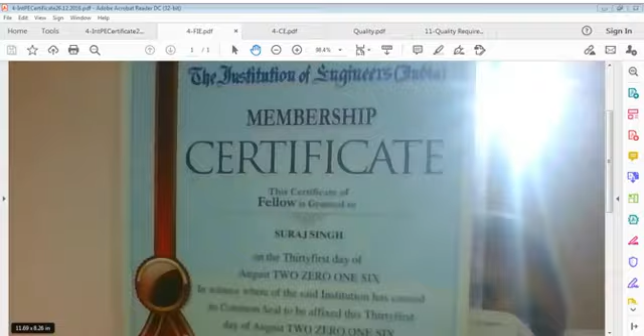my will, my concentration, my dedication towards quality is very important because these certificates, like professional engineer certificate, international engineer certificate, and this fellow membership certificate which is called chartered engineer, have no value if we can't give quality. Quality is very important. Quality requirements are very important. Well, quality is everybody's headache, to be very frank. Particularly engineers all over the world are responsible for quality. They must be, and they should be.

Our engineers in this country, I cannot blame everybody, but in general, quality is overlooked. It's condoned because target is not quality, target is project, target is milestone, target is only quantity. In many cases, there may be certain people who are good in quality because they have worked overseas also. They understand meaning of quality, and everybody understands actually. But the system is like that. People are fed up with that system, but it is very difficult to achieve quality in our system, in our country.

And it's not only in construction, it's in every other field. You buy whatever product from market, you will not get quality. Whatever quality you expect when buying something, you won't find that quality in reality, in performance. This is a very small slip I am showing to you, just 7 papers, and also in different fonts. It states something about quality and approach, and I changed it many times, on the 15th, then 21st, and then on 23rd May.

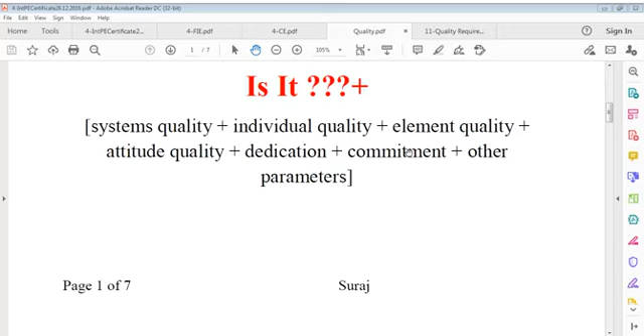So it is each person's responsibility, including top. You cannot say only the quality person is responsible if quality has gone out of control. That can't be said because it's a question of system. If the system is involved, quality control is also involved. Even one wheel cannot be out. If in a train one wheel is out, two wheels are out, how can you expect the train to move? If you take out one wheel of a car, you think you can drive the car that way? You can't, except in some cases very slow. Everybody in an organization should be considered a fit person, and that's a very important point.

A little further, again I say designs of structures and others must be qualitative and reliable. There are so many issues which have to be considered in the designs. We have to consider every common design first. Forget structures currently. Designs of every activity, designs of even the very smallest work. Something you want to talk about, you have to think before. Just like we form an agenda, that's also a part of the design of a meeting. We section this meeting in such a way. That's also a kind of temporary design, but we do that.

It applies everywhere. Just like we design our timings, though we call it time management or tabulation of time, it's a kind of design. It should be justifiable. No time should go to waste. There should be quality for everything. Time is not in your control. Time is passing. We say, rise, the day is passing. Get up. Day is going. Catch it. Hold it. It goes out of control. You can't do anything. And that's the control of quality.

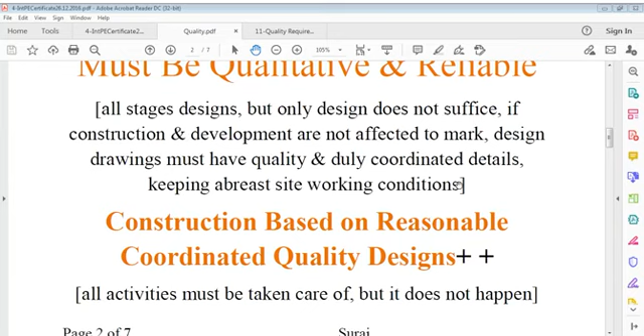Construction based on reasonable, coordinated quality designs—that's what I say. Construction based on reasonable, coordinated quality designs.

If our designs are quality, detailing is quality, and nowadays computers are available, coordination may not be a big problem—because that coordination is not only structural or structural-architectural coordination, but also related to remote works like services, which are very important. There are many types of services these days to support a building: electrical, mechanical, HVAC, lift, security, or many more electronic services like CCTV, gas services. You may define what more—there is no limit, depending on the type of building or structure it is.

So again, construction based on reasonable, coordinated quality designs—all activities must be taken care of. But it doesn't happen. That's the point here—it doesn't happen. Why doesn't it happen? All activities must be taken care of, but it doesn't happen. That's the problem.

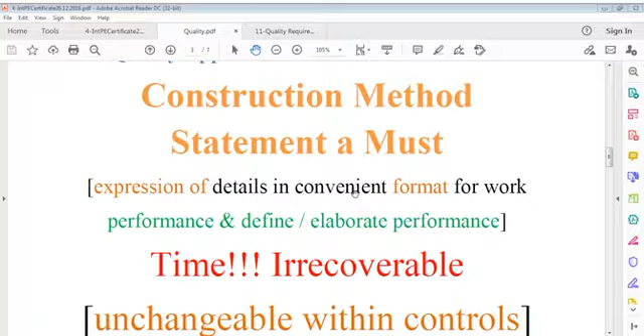That's what is important. So we have to be considerate about time, which cannot come back, which is irrecoverable. Time, if you lose it, you can't recover it. Time, if you gain it, you get the benefit of progress. You can move further. So you can say time is a very important factor, and it is unchangeable.

You can't change the contract duration. You may reduce it through your efficiency, but you can't enlarge it. You can't extend it yourself, because it's a question of cost for someone. So time is to be considered that way. Whatever is the project time, you have to use that time properly.

It should be established practice to understand time, to use time, and to finish milestones according to that time. That is defined by planners, by planning management, by a planning organization, or if you do it yourself, you can do it yourself, there's no bar. You can be the planning engineer of your job, or hire some good friend as planning engineer who looks into the matter successfully and seriously. And then time relates to cost.

If you do the work in the defined time, of course you stay within budget. And if you exceed time somewhere, this means cost is exceeded. And if you reduce time on the overall project, certainly cost is reduced to some extent. There could be any reason for that. So the time factor is very, very important.

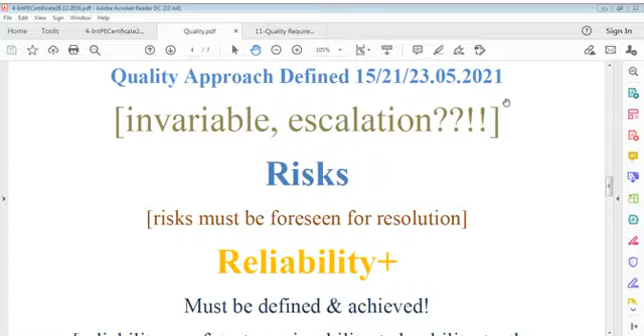If you are able to, because of your experience, foresee that risk, you can contemplate and think of resolving solutions if you know what the risk could be. That is very important. If we know the root of that risk, we can eliminate that root and put in our convenient support so that risk mitigation is done, and we can perform in a better, more efficient way. That's very important, and that's the job of every engineer.

There is no bar. If you want to refine yourself, if you want to refine your project, if you want to move your project fast, people will be happy. As far as controls are concerned: cost control, quality control, time control, research, and many more controls where everything requires control.

Reliability is a great definition, and one not so easy to achieve in normal circumstances. That reliability constitutes a very high profile, and that profile you have to establish.

Whether I am reliable or not, I cannot say, but I can understand whether I am reliable. People have different criteria to view my performance - my clients, my associates, my colleagues. They may understand my performance, but what they expect I don't understand. Either they tell me, or I judge from them, since maybe they can't speak to me openly. But if they can do that, then I have to understand it my way and grasp what they expect of me.

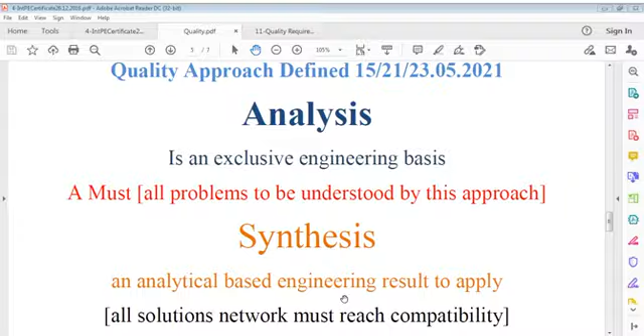Or you may say both are powerful. Analysis in one direction, synthesis in the other direction. If one is plus, one is minus, but both work together. Work is same, name is different, that's all. So synthesis, an analytical based engineering result to apply. All solutions network must reach compatibility, which is, you can say, interface it together.

Interface together with all disciplines, whatever you are going to do for that project. And that network must be compatible. Your work should be compatible. Your equipment you are providing on that project should be compatible to support electrical, electronics, some other facility. Whatever is there should be done properly in a coordinated manner.

If you are not able to do that, then you have to call that sub-discipline engineer or that discipline engineer and discuss and decide. So you have to coordinate. You have to coordinate unlimited thinking. Thinking is unlimited, it's not one thing, not two, not three. However many points come in there, you have to think about. It is an unlimited activity. That point you have to understand very well.

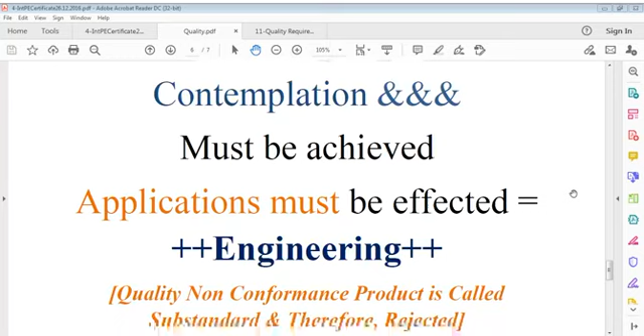Sometimes people are not able to conform to requirements for whatever reason: ignorance, incompetence, or redundant personnel on site or in designs. I don't understand why not comply with the requirements when you are getting paid. What is that? Why are you not getting it? That's the question. If it is a genuine one, there is no complaint. If you are just discussing, I am not talking of that. I am talking of free handling of material and timing.

So we can say non-conformance means the engineer is either careless or ignorant or incompetent, and therefore redundant personnel must be acted against. We must change to requirements to achieve intended quality standards for universal recognition. Quality requirement checks being a must, missing which we have to blame ourselves for quality failure.

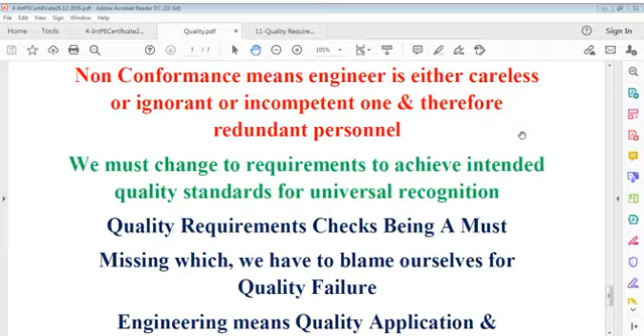Quality requirement checks being a must, missing which we have to blame ourselves for quality failure. Engineering means quality, application, and continuous improvement of quality. Quality improvement, we said, is what we say.

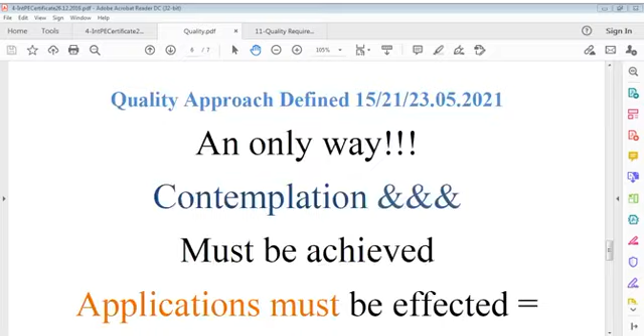Now we'll talk of quality requirement checks guides. This is the item for excavation. We have explained it already, including surveys, setting outs, all that. I can't explain every time, but you can use this page for reading if you wish. There is no problem. I have explained all these points before. There's no meaning in explaining again and again, but you can make use of this.

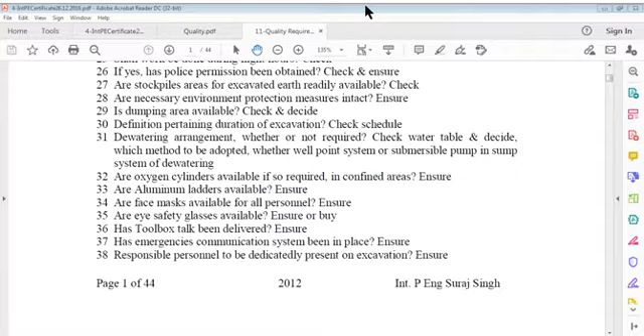Gentlemen, let's go to quality requirements now. Last time I explained to you about excavation, about setting out, which contains surveys, establishment of site points, dewatering requirements, safety issues, what to do, what not to do, hot work or cold work, PPEs, toolbox talks, etc. to be considered in that.

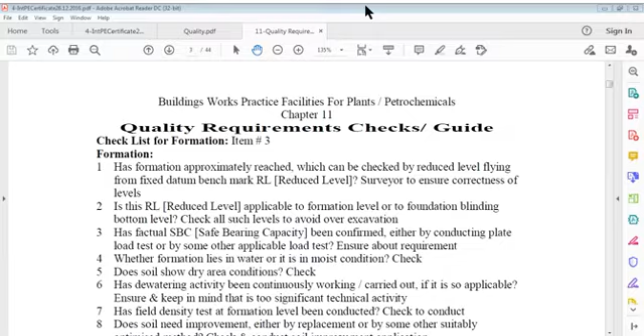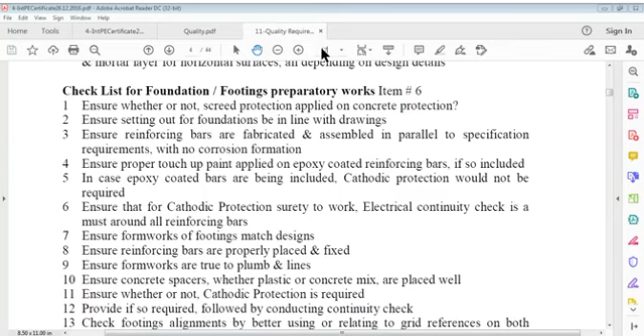Then we talked of hand excavation or manual excavation to make sure that existing live services are taken care of. This was in that item. Then we talked of formation, which is a very important point, and then blinding, and many such concerned activities like concrete protection or waterproofing, which is a very important activity. Some people call it waterproofing, but I say the concrete surface should be protected from soil.

That is very important, because if soil contains chlorides, sulfates or other chemicals which are harmful for the concrete surface in the foundation, because the surface is in contact with soil, those chemicals can penetrate into the surface of concrete and cause harm. Generally foundations are in contact with soil up to at least ground floor level.

To protect concrete surfaces from such harms, we provide this membrane, which is called a waterproofing membrane or protective membrane. Generally it is called a membrane, people call it waterproofing, but I usually call it concrete surface protection from soil. It's not so simple technically speaking. There are so many issues in that.

Well, if it is a plant area, facilities area, a big refinery, that's different, because there are no structures around. It's a new green project, and of course a sea area, but it is raised and in better control than a buildings area, residential or city area, where buildings exist already and there may be impact on the soils which found those buildings. Generally the problem lies in the strata below: sand, limestone, soft sand rock, clay or silt strata, depending on the area.

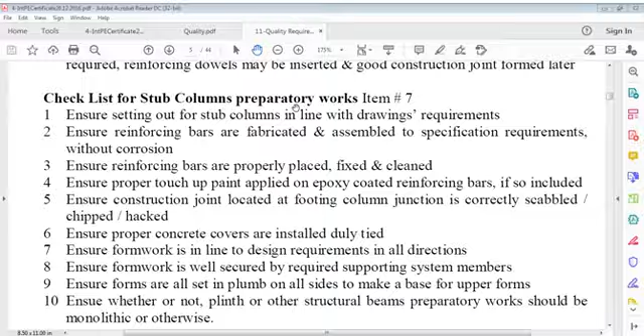Then this item of stub columns is mentioned here clearly. It's not a very long item. I have given a description of stub columns. Then backfill work. Backfill work, some people consider this important, some people don't consider this important. But for me, it's a very important item, backfill. It's very important depending on the type of project.

There are so many classifications of fill or backfill. You can say selected fill, imported fill, desert fill, granular fill, or design fill. So many types. Sand fill. This fill, some people don't take it seriously, but it must be taken very seriously, because these lead to future problems. And people don't have an idea about density of fill, or this may cause sinking in future, settlement in future.

Generally, below foundations we don't consider fills. Yes, we can consider fill when we improve soil, but that fill is different. That is not the fill I am talking about. That is soil improvement, which is well compacted, well designed, well tested. The fill I am talking about is backfill, surrounding foundations, surrounding all foundation beams or columns, and whatever space if you have done mass excavation, which is generally done in many cases to have better circulation of work and machines.

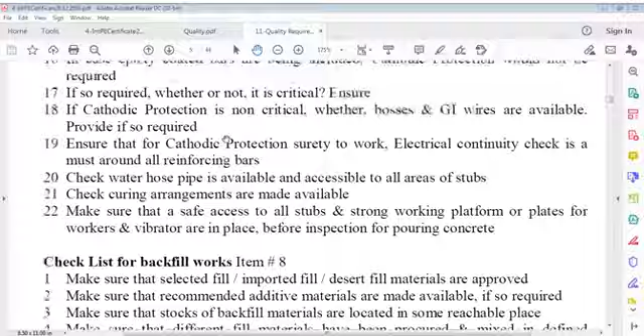Yeah, it's that. Check whether or not all substructural activities are completed, including block or brick walls. Check that all rubbish and debris are cleared from the area. Ensure concrete protection membrane is applied on all surfaces and well protected. Ensure bottom portion of shoring is removed. Ensure stages of shoring removal during backfill progression. Ensure backfill activity approvals prior to starting a backfill layer.

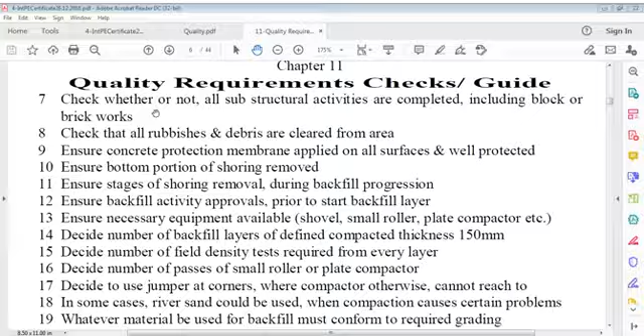Ensure necessary equipment is available: shovel, small roller, plate compactor, etc. Decide number of backfill layers of defined compacted thickness, that is 150 mm. Decide number of field density tests required for every layer. Decide number of passes of small roller or plate compactor. Decide to use a jumper at corners where the compactor otherwise cannot reach. In some cases, river sand could be used when compaction causes certain problems. Whatever material is used for backfill must conform to required grading.

These are very few points, and we have to better explain them if we can. This is not very big science. It's normal practice on site. We have to make sure, of course, which fill we have to do. Selected fill, imported fill, desert fill. Imported fill doesn't mean imported from other countries. Locally, if some good material is available somewhere, we can import that for our site. Desert fill means if desert fill can be used, we have to see its properties by testing.

So there are so many methods in this. We have to decide depending on locality what's best practice there, how it works, and then we have to see recommendation of additive materials to be made available if so required. As I said, design mix, not concrete mix, backfill material mix. There's a procedure for that. I'll let you know later on.

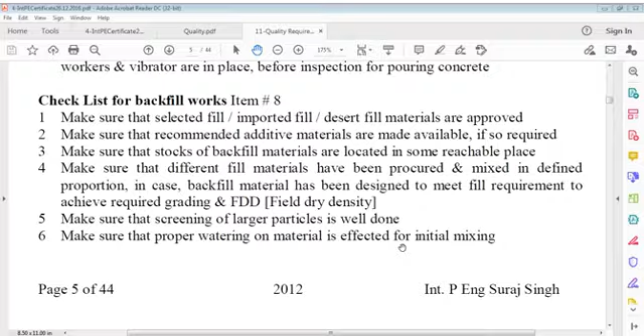Now, screening of large particles is done. As I said, screened through the shovel bucket. Then proper watering of the material is effected for initial mixing. Proper watering of material. Now we go to the next one, that is here.

Check whether or not all substructural activities are completed, including block or brickwork. This depends on designs, what is there in foundations and structures below ground, what plinth beams are there, or block wall, or brickwork, or RCC wall. It depends on your details. Anything can be there. You have to make sure that these are all completed and cleared.

All application of membrane is done, let's say concrete protection membrane applied on all surfaces, internal as well as external, horizontal or vertical, and protected. It should be protected to requirement or design, whether by mortar or plaster application on horizontal surfaces, or vertically by flexel sheet or some other sheet, so that whatever material we fill in, which may have angular chips or stones, does not puncture this membrane.

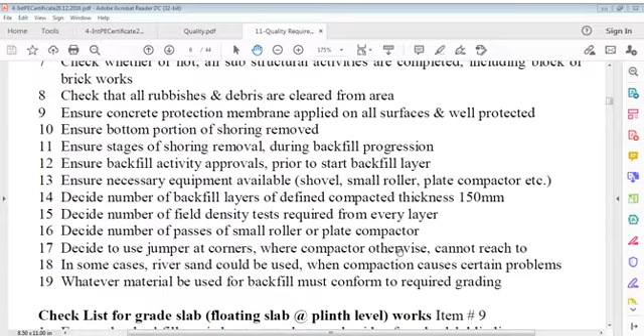And whatever material is used for backfill, it must conform to the required grading. This is the general idea of backfill. I tried to explain this to you because it is a very important material, and I also tried to explain about these stub columns, which are the first element of structural framing.

This is also very easy - you have to be clear that these bars are already embedded in the footing or whatever design you have in the foundation. It may be beam designs, or a raft, or whatever. These are already embedded in and protected from water and moisture access by a polythene sheet, and you have to just tie them properly, check their locations when the surveyor marks the location at the bottom, and make sure the steel is good.

Then allow shuttering on that, and provide covers at all supports as usual. Then, if required, connection to cathodic protection can be done - whether it's critical or non-critical depends on the design; it's a must if specified, otherwise don't provide it. If you provide epoxy coated bars, the question of cathodic protection does not arise. When you provide epoxy coated bars, moisture protection is not necessary, but touch-up paint is always necessary before concreting. That's the only point there.

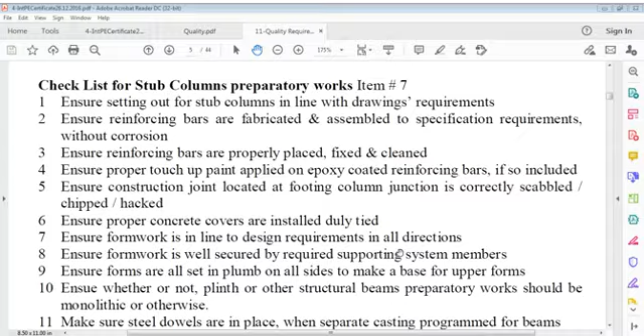All the same, you have to make sure the size of the column is okay, and that the plumb is okay. That's the procedure as defined. You can do the concreting by making an accessible platform, a good working platform, because the height is not much and it can be conveniently done. Only the access needs to be tidy, so there is no way people could fall into the trench.

This care we have to take, and we have to make sure that if there are beams, these are done next time, because it's difficult to do with these columns - it's not sensible, and doing it separately does no harm. This is a very normal activity, normal steel details I have shown to you before.

I can show it again, can be done. I will show you these details now, hold on. Let me go to these details, because detailing is very important from an engineering viewpoint for which I'm talking. If you don't show details, there is no meaning of talk. Some details must be shown to you - that is the sole purpose here I'm trying to bring to you.

Let me see if I can go to that file, in the management documents - this is the method statement, chapters, sketches, here it is. I showed this to you now. Seawater basin, water pumping, building sewer plant - where is that? Pipe culvert, the foot form.

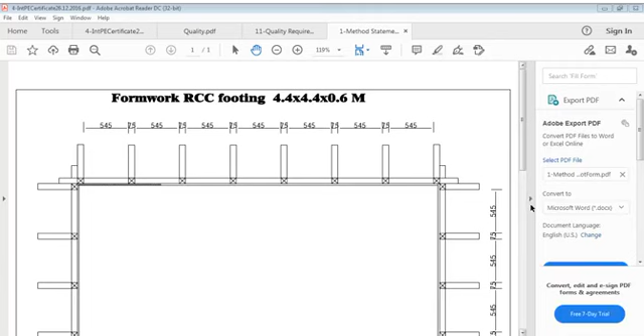Let me show you the foot form first, then I will show you the column form. Okay, foot form, let's see first. Got it, this is the foot form. It's a big form, no problem. We have to understand only 4 meter by something, 4.4 to 0.6. This is this form, and I'll take you down to another form also.

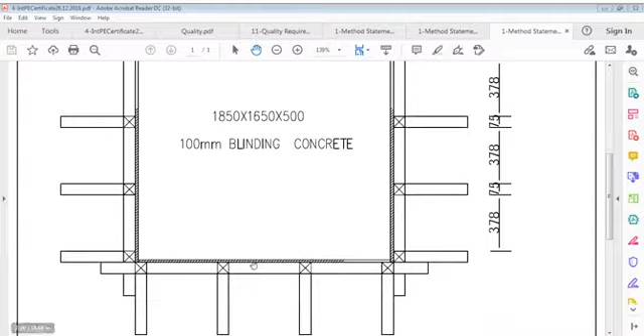These are battens. This is the construction of this form, and these go across like this, and there is a supporting system here, if you can see that - you can see here. Let's say it's 50 depth or whatever, the depth is not a question here. The question is how to - this is PCC here, blinding, then above that, here is the form sides, generally called plates in our construction world.

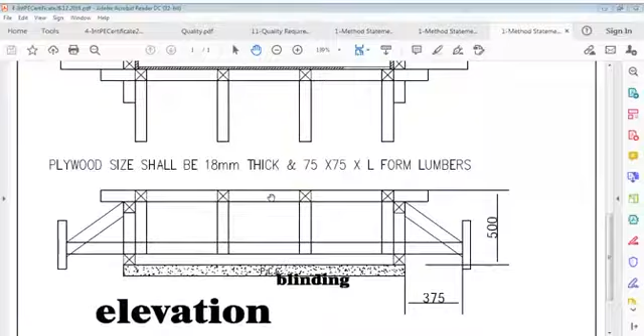Concrete has to go above the blinding within this space, and the column would be here. There's no option because this is the work of footing - it's there. This is the general detail, and we can also say - you may see this. Let's see, is that one. I'll show you the other one, that is this one, and it's for column.

Let's say this is column - it's a beam, of course, but it's giving details of the column. Let's say this slab or whatever, 0.45 level - maybe it's the level here, and here this column starts. You can see this column below the ground beam, so this is that column below ground beam. It starts here.

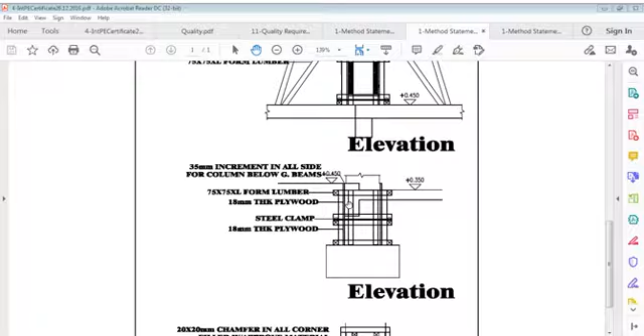Same composition here of details, and this is a very small height column, these details here. So it's very clear here - the level is 0.45 from here, and here you can say that it starts. Now this is super column, you can say, you see.

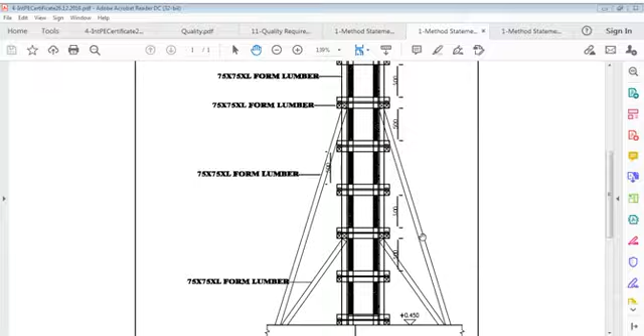Bolt sizes are given here, form lumber is shown, clamps are shown, then supports are shown - these are general details of this. Chamfer is shown here, this is 20 by 20 or 25 by 25. In a column, if it is exposed - meaning there is no wall or something, it's an exposed one - chamfer is generally provided, so this is that one. And spacing, vertical spacing is shown - it's a general detail all over.

I close this now because the purpose is over. I will find some other method if required, and it's over now.

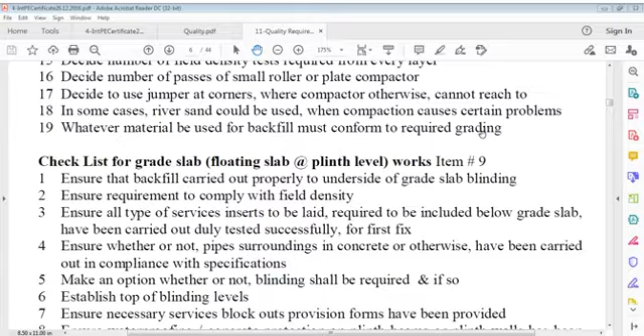Now I'd like to show this small detailing to you. Then this is for the floating slab, which is very easy, as I explained to you before. And RCC columns work - item 10, RCC column works, as just now I showed to you. You have seen here.

I'd like to show something here which is very important from a backfill point of view. Yes, I will show you that one. Basement structural framing, or start framing, foundation beams. I will show you that one, it's a better thing. So I get this is part 1.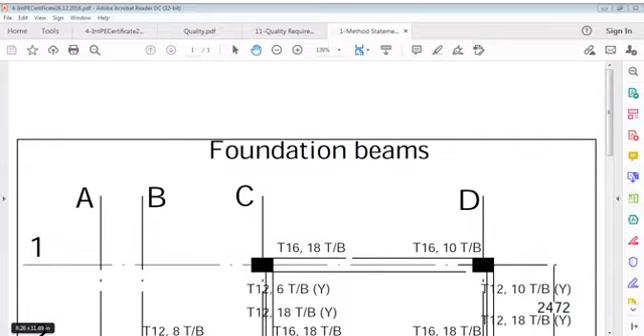Sorry, just a minute please. I'll show you that one. Those two drawings I'll show to you. This is one here, and the other one is also here. There are two sketches here.

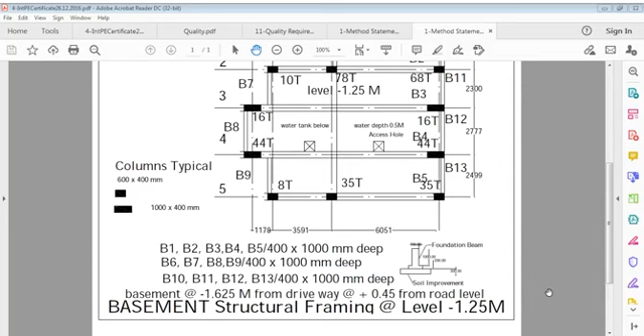In this sketch, you can see this is a plan at basement level, various beams. You can see this beam here. This is the section of the beam, and this is soil improvement, which is 300 mm thick.

In this improvement, firstly I did a 75 mm fill. In that we fill with, you can say, 40 mm, then 20 mm, and then 12 or 10 mm, meaning three layers, and then dust. All these materials were placed so that no void is allowed.

Then on this we provided waterproofing, a chemical layer you can say. We provided here a polymerized cement application coating - you can say polymerized cement coating, which is generally called tapecrete by some manufacturing units - mixed with cement and laid in 2 coats, protected by mortar.

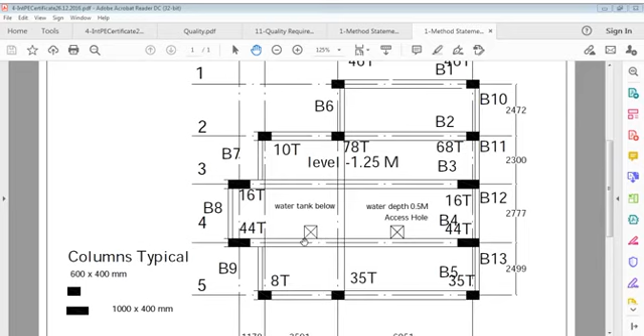All columns are connected here. And here is the water tank between these beams. This is what we provided, and in fact this is here, this is here, this is here. All these portions are to be backfilled except this portion, because this is a water tank.

And if you see the other one, same details here. This is what I'm showing to you. From here the column starts - column and periphery wall starts from here. Periphery walls means RCC walls. Here this is a wall, for example.

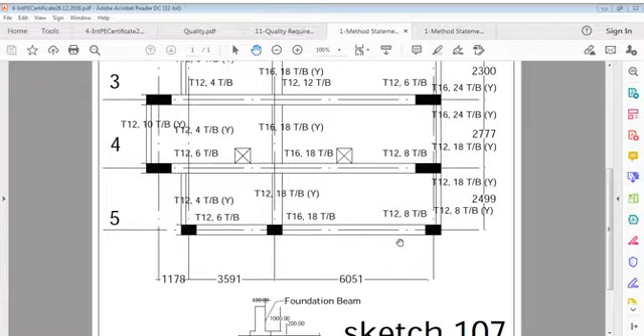This is wall here, wall here, here, here, here. All this is the periphery and basement walls here, starting from here, and columns also starting from here. Same here, you can see. This is the purpose of this.

I showed this to you for clarification of what was done. Then I close this now, the purpose of this is over. You can just have a look at this if you wish.

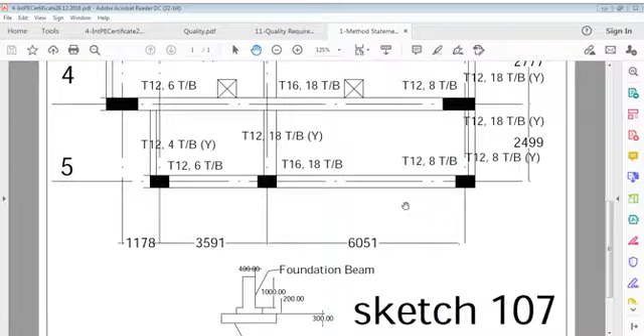Dimensions are here - this is about more than 11.5 meters here, and this is 6 meters. This is 3.6 here, and even approximately this is more than 11.5 something. And these are smaller, you can say.

And I show you also another plan of this house for better clarification. This is the existing portion at one level, ground level, and this is new construction. Details I showed to you on this one, this one.

Here this boundary wall is a little tapered one. This is building here, this is building here, this is road here. And for this excavation, this building existed.

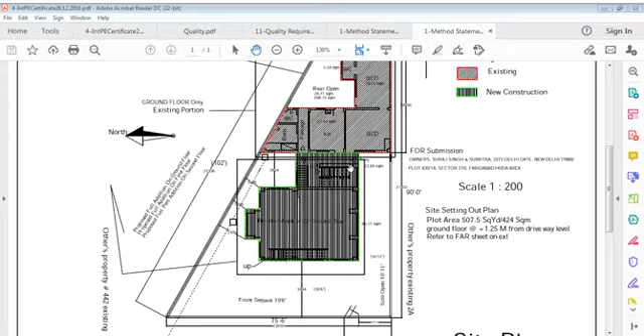So you can say on 3 sides, this excavation which you had to do - this side is building here, this side is building here, this side is building here, this end you may say - and we had to excavate around here, and a ramp was made somewhere here, a ramp for the machine to come, for the machine entered here in the basement, excavated that one.

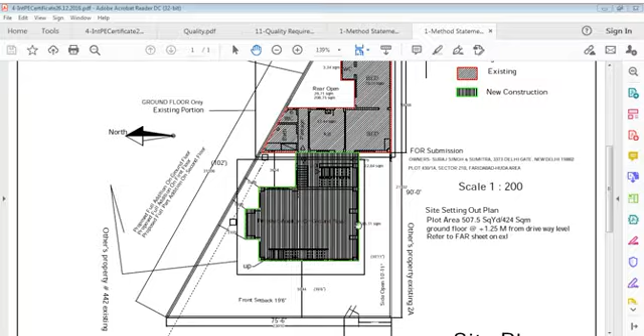So I'm just trying to show you what I was talking of. We had to backfill this portion within beams, 1-story backfill, so 1-story construction below ground, and within beams we backfilled after application of polymerized cement. So I put it off also.

Purpose is over. So now we continue our talk as said, on columns. So you understand, I showed to you columns formwork, I showed to you footings formwork, and I have showed to you these typical plans of a certain small building. So what we can say for columns is, columns are above ground at certain height. We pour up to full height, I always pour full height, whatever the project.

Full height means in one go I want to cast the column. It may be 4 meters or it may be 3 meters. Generally, if it is 4 meters, column may be 350 centimeter height. Whatever it is, I want to cast it full, and that means we have to design our formwork accordingly to sustain pressure of concrete in fluid state. So ensure safe scaffolding with working platform in position for access around columns for preparatory works. That's what we do to start preparatory works.

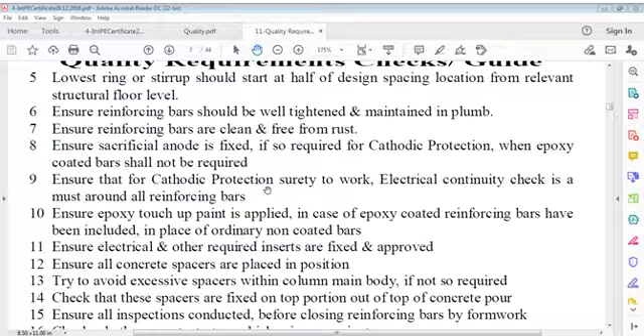Ensure epoxy touch-up paint is applied in case epoxy coated reinforcing bars have been used in place of ordinary non-coated bars. Ensure electrical and other required inserts are fixed and approved. Ensure all concrete spacers are placed in position, and try to avoid excessive spacers within column main body if not so required. Check that these spacers are fixed on top portion out of top of concrete pour. There is some meaning behind that. Where possible, don't place them where concrete shall embed them, particularly at top and also at bottom.

At bottom, it's sometimes no use, if your cover is okay, that you provide these blocks in every column. If you think that the top position shall cover all and these steel bars will not be displaced, then it's better to keep these spacers on top, avoiding concrete embedment. If that is workable, it's better, I think.

So it's just a matter of how you arrange on site, how you can ensure on site that the column shall remain in its position, and the steel bars shall remain in position without moving. That is most important, and use as few bars as you can. So I say try to avoid excessive spacers within the column main body if not required.

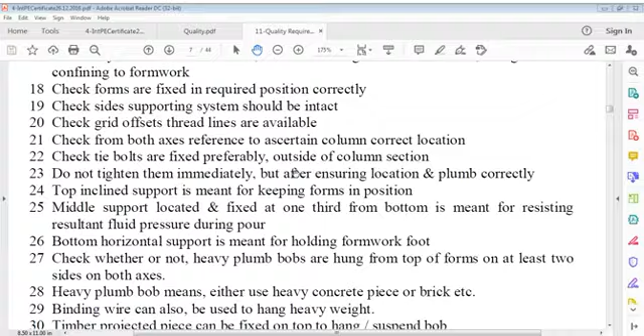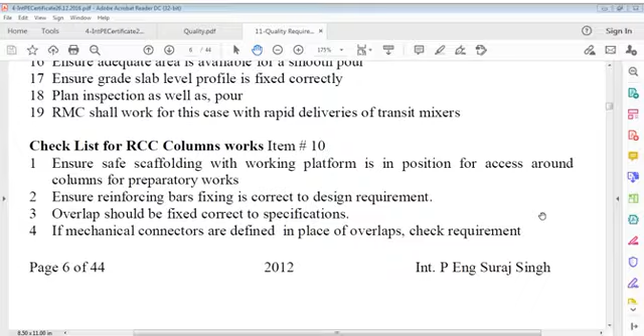Ensure reinforcing bars fixing is correct to design requirement. Overlap should be fixed correct to specifications. If mechanical connectors are defined in place of overlaps, check requirement. Lowest ring or stirrup should start at half of design spacing location from relevant structural floor level. Ensure reinforcing bars are well tightened and maintained in plumb. Ensure reinforcing bars are clean and free from rust.

Ensure sacrificial anode is fixed if so required for cathodic protection when epoxy coated bars are not required. Ensure that for cathodic protection to work, electrical continuity check is a must around all reinforcing bars. Ensure epoxy touch-up paint is applied in case epoxy coated reinforcing bars have been included in place of ordinary non-coated bars. Ensure electrical and other required inserts are fixed and approved.

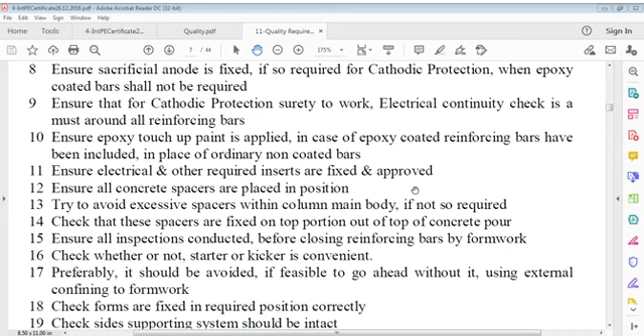Ensure all concrete spacers are placed in position. Try to avoid excessive spacers in the column's main body. If not so required, check that these spacers are fixed on the top portion out of top of concrete pour. Ensure all inspections are conducted before closing reinforcing bars by formwork. Check whether or not a starter or kicker is convenient. Preferably, it should be avoided, if feasible, to go ahead without it, using external confining to formwork.

Check forms are fixed in required position correctly. Check side supporting system is intact. Check grid offset thread lines are available. Check from both axes reference to ascertain the column's correct location. Check tie bolts are fixed preferably outside of column sections. Do not tighten them immediately, but after ensuring location and plumb correctly.

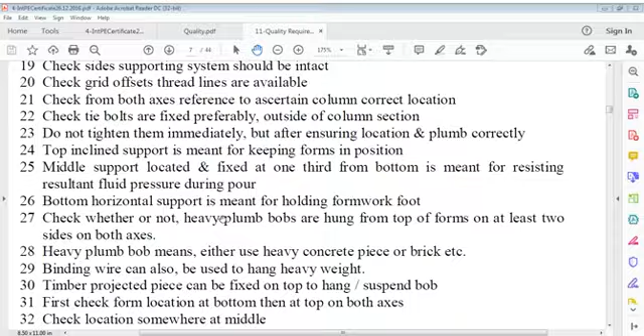Top inclined support is meant for keeping forms in position. Middle support located and fixed at 1/3 from bottom is meant for resisting resultant fluid pressure during pour. Bottom horizontal support is meant for holding the foot. Check whether or not heavy plumb bobs are hung from top of forms on at least two sides on both axes. Heavy plumb bob means either use a heavy concrete piece or brick, etc. Binding wire can also be used to hang heavy weight. A timber projected piece can be fixed on top to suspend the bob.

First check form location at bottom, then at top on both axes. Check location somewhere at the middle. What I say is, first check form location at bottom, then fix the top. You have to fix both bottom and top for that purpose. And after that, check location somewhere at the middle.

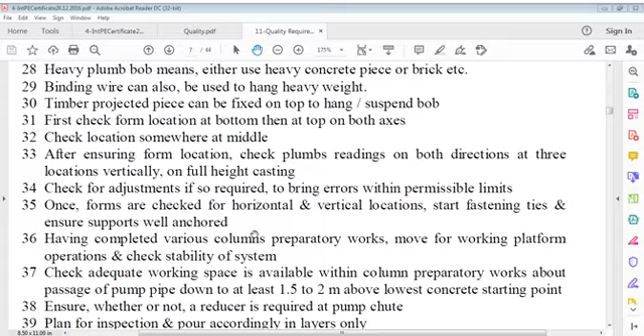After ensuring form location, check plumb readings in both directions at three locations, particularly on full height casting. Check for adjustments if so required to bring errors within permissible limits. Once forms are checked for horizontal and vertical locations, start fastening ties and ensure supports are well anchored.

Having completed various columns preparatory works, move on to working platform operations and check stability of the system. Check adequate working space is available within columns preparatory works. Pass the pump pipe down to at least 1.5 to 2 meters above the lowest concrete starting point. Ensure whether or not a reducer is required at the pump chute. If so, get it. Plan for inspection and pour accordingly in layers only.

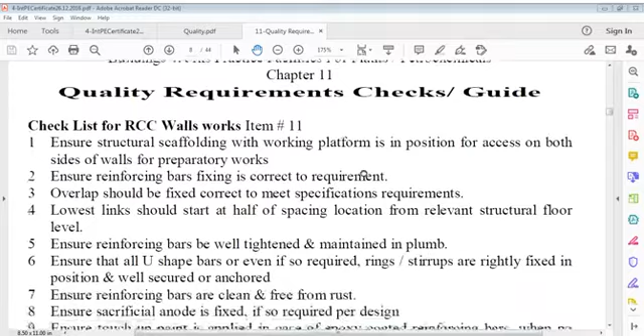So that was about columns. Pouring we'll discuss later on, and I think you must get something in this. It's a very important point.

Now we'll go to the checklist for RCC wall works, item 11. I think I showed you that one, RCC wall work. Sure, I remember, but I will refresh it, because of what we showed before, RCC wall form. I should make use of my drawing. I have that one, RCC wall form.

You can see this wall form here. This is say 30. I don't know what size it is, it depends. This is 1 meter only for bolts, and this is 4 meters high, 20 mm ply, batten 50 by 75, vertical length. This pour platform, this is jack supports to scaffolding, and this jack supports the wall. 3 supports here: this fixing support, this is pressure support, and this is a platform for the purpose of pouring and working.

This is for pouring, but there was some other platform before for working, which is gone now. It's not shown. There is a different one. It's a raised one now. It was a different one for support here. This was here, a different one. No, it's only for information.

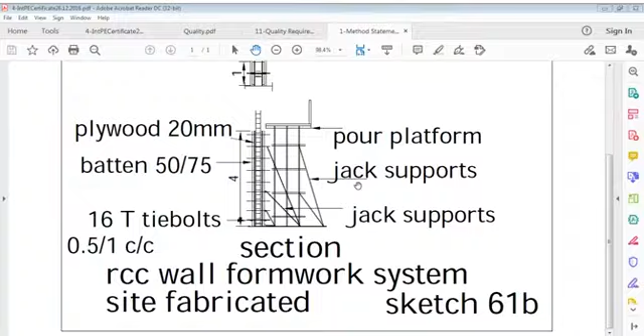This is that. Then this says checklist for RCC wall works. Ensure structural scaffolding with working platform is in position for access on both sides of walls for preparatory works. Ensure reinforcing bars fixing is correct to requirement. When I say requirement, this means to designs. The design is the requirement here.

Requirement is multi-dimensional. It's designs, it is method statement, it is specifications, it's codal, though it's not considered very much. So reinforcing bars fixing is correct to requirements. Overlap should be fixed correct to meet specification requirements. Lowest links should start at half of spacing from relevant structural floor levels.

In item number 2, as I said, reinforcing bars fixed correct to requirement means design requirement, details requirement, and also BS. If you use BS 8666, the shape codes given in drawings, you have to meet them. I used BS 4466 in my time. It is now 8666. Various shape codes are there which you have to design. I mean, you have to calculate their lengths on your Excel sheet. It's not difficult, it can be done.

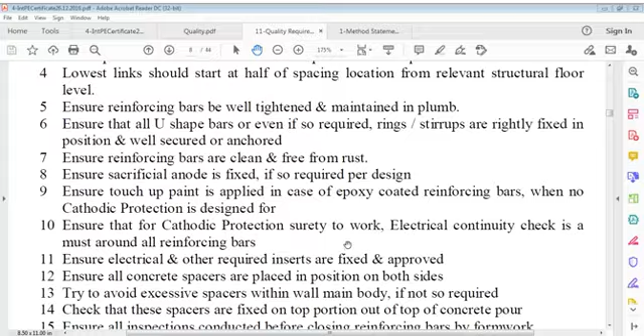Ensure reinforcing bars are clean and free from rust. Ensure sacrificial anode is fixed if so required per design. Ensure touch-up paint is applied in case of epoxy coated reinforcing bars when no cathodic protection is designed for. Ensure that for cathodic protection to work, an electrical continuity check is a must around all reinforcing bars. Ensure electrical and other required inserts are fixed and approved.

Ensure all concrete spacers are placed in position on both sides. Try to avoid excessive spacers within the wall main body if not so required, as I discussed in column. Same thing applies here as well. Check that these spacers are fixed on the top portion out of the top of concrete pour. Ensure all inspections are conducted before closing reinforcement bars by formwork.

Now, before you close your wall by formwork on both sides, one side is fine, you can prepare for it. Your reinforcing bars must be inspected, though it's not a big deal, it can be done, no problem. Check whether or not a starter or kicker is convenient. As I discussed before, preferably it should be avoided if feasible to go ahead without it. Using external confining to formwork, a similar type of procedure exists for this activity also.

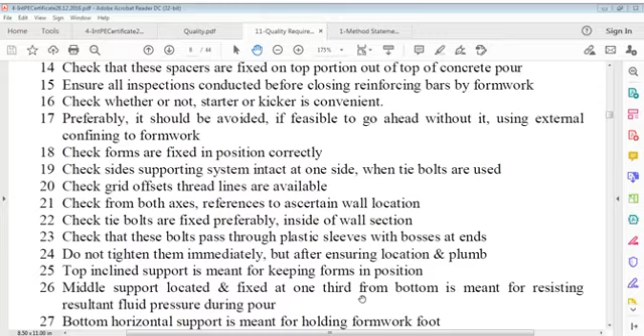Check forms are fixed in position correctly. Check the side supporting system is intact at one side at least when tie bolts are used. If you cannot fix the other side for some reason, you may depend on one side when tie bolts are used, and the system should be tightened properly. Check grid offsets. As I said earlier, thread lines are available. The same grid axes used for columns should also be used for this purpose, so that central dimensions are not impacted. The center of wall should be established, and from there you measure shuttering locations. Also check from both axes references to ascertain wall location.

Check tie bolts are fixed, preferably perfectly inside of the wall section. Check that these bolts pass through plastic sleeves with bosses at ends. Plastic sleeves with bosses at ends, mind it. These bosses can be taken out later and filled in with a different chemical compound. Do not tighten them immediately, but after ensuring location and plumb accuracy.

Top inclined support is meant for keeping forms in position. Middle support, located and fixed at 1/3 from bottom, is meant for resisting resultant fluid pressure during pour. Bottom horizontal support is meant for holding the formwork foot. Check whether or not heavy plumb bobs are hung from the top of forms at 3 or more locations, depending on length of RCC wall. Heavy plumb bob means either a heavy concrete piece or brick, etc. Binding wire can also be used to hang heavy weight. A projected timber piece can be fixed on top to hang

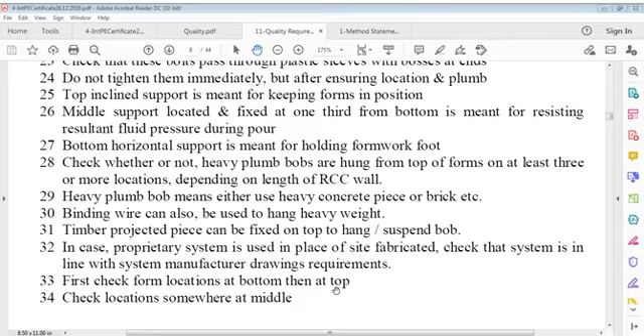And after ensuring form locations, check plumbs at all locations, vertically on full height casting. Check for adjustments if so required to bring errors within permissible limits. Once forms are checked for horizontal and vertical location, start fastening ties and ensure supports are well anchored.

Once forms are checked for horizontal and vertical location, start fastening ties and ensure supports are well anchored. Having completed various wall preparatory works, move for working platform construction and check stability of the system, because people have to use it for standing, accessing, vibrating, and moving between locations. This is a temporary construction operation, so check stability from every point of view of safety. Then plan and inspect the concrete pour.

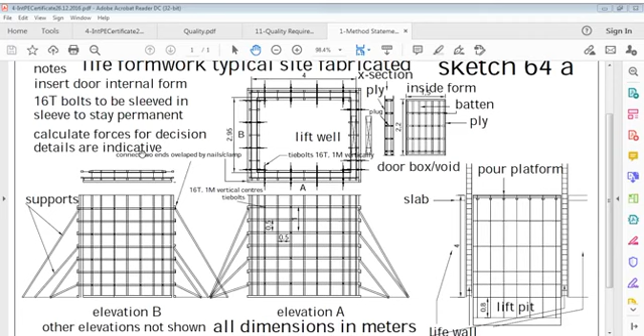There is a spelling error, don't worry about that. This 'LIFT' actually by mistake became 'LIFE', it was an AutoCAD issue. I can't correct it now because it's difficult to take a print immediately.

So it's lift formwork type, typical site fabricated, and this is the lift. Usually, maybe generally in this country, India, Bharat, people rarely use RCC for lift walls. But it is used in many countries and is a standard practice because of many issues concerned - I'm not going to discuss that.

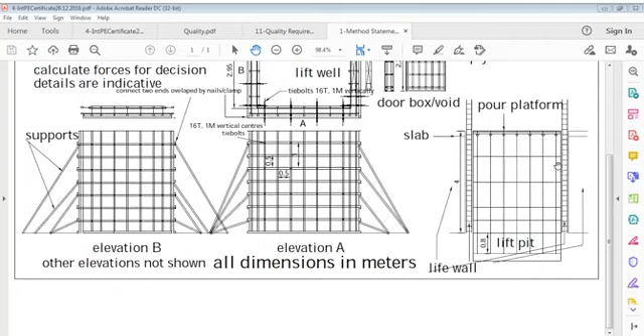But my proposition is, in case you have an RCC lift well, which it is - this is the lift well, you can see. This is the lift well, lift wall, lift pit, and this is the lift well. It goes up. There's some platform here to support working at this level.

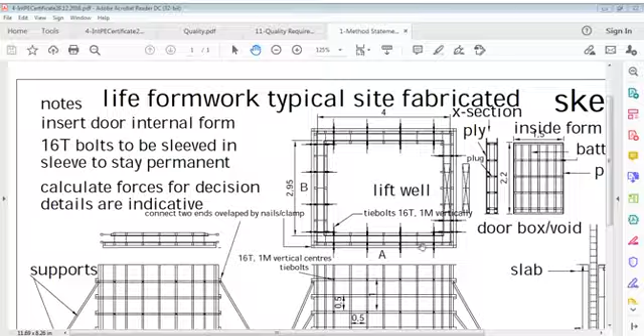Our scope in this formwork is we have to keep these form sides, internal as well as external, and this door here is to be closed because no concrete has to come into this portion. Concrete comes to this height, to this height from here, while in the portion above this, concrete has to come full height, full circle, full square.

You can see these forms, which are very important from a fabrication viewpoint - analyzing and calculating stresses, or calculating the load of forces on these members: the supports, the plywood, everywhere it has to come in this form structure. That point you have to understand.

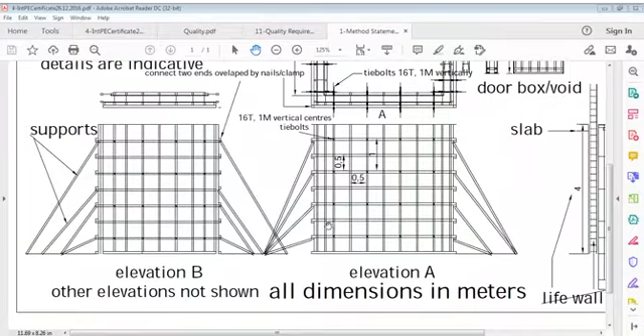You can see this wall, and here is the slab. This is your formwork detail, and it must be strong enough to sustain the forces that concrete in the wall would transfer to this system of plates and bolts. These plates, bolts, and supports would resist all these forces, for which calculation has to be made.

The system is almost the same as I showed you for the wall form. Pouring will be a question here - we'll discuss that later about the pour. We're now talking about the lift contents of the wall. Lift preparatory works are very important.

Details are typical but complicated in many senses, because there are two corners here, corners here and here - four corners - and ends, two jambs. These corners create problems. There may be issues with movement out here and here. That point we have to understand. In case this moves out, it can cause problematic formwork - it can open, and it can fail the pour.

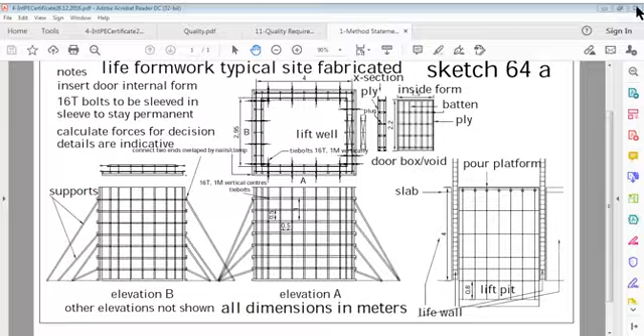So what I was talking about was this well walls with this door. We have elevation A and elevation B. This is elevation A and elevation B. Typical design, symmetrical design, except that we have to fix these in different heights.

Meaning all these should fit into each other, and spacing is given half a meter here in square, and this is spacing 1 meter. This is for tie bolts, and spacing here also is about 1 meter. So you can say in this 2.95 meters here, and total is 4 meters. You may say 1, 2, 3, 4 and 4, 8, and 4 here and 4 here.

4, 12 tie bolts are there. There are many such considerations in this that you have to put in.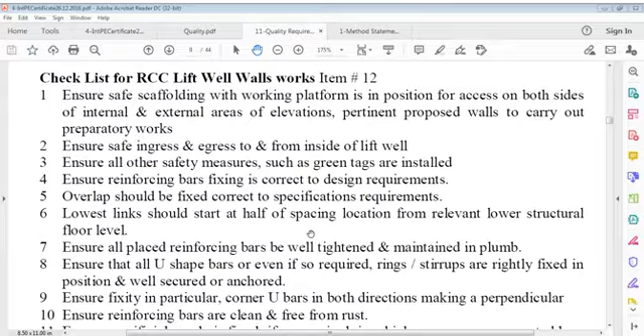Ensure all placed reinforcing bars be well tightened, fastened and maintained in plumb.

Ensure that all U-shaped bars or even if so required rings, stirrups are rightly fixed in position and well secured. These U-shaped bars generally, for your information, generally are installed here like this, and there may be many rings between, possibly can be done according to design. Again, U bars here at every corner, and there could be rings here, no problem. It's usual practice, our designer wants to tie this work.

So you can say ensure that all U-bars are, even if so required, rings, stirrups are rightly fixed in position and well secured or anchored. Ensure fixity in particular corner, U-bars in both directions making a perpendicular. Ensure reinforcing bars are clean and free from rust.

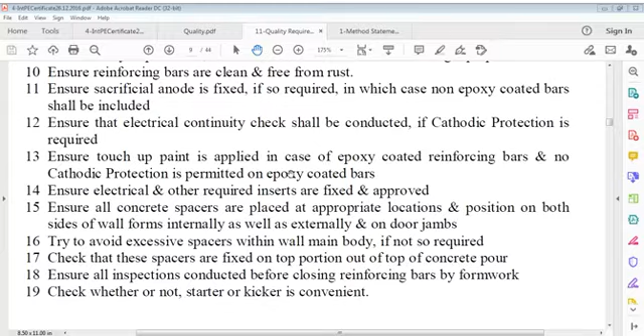Ensure all concrete spacers are placed at appropriate locations and positioned on both sides of wall forms, internally as well as externally, and on door jambs. Try to avoid excessive spacers within the wall main body if not required, as explained in other activities. Check that these spacers are fixed on the top portion, out of the top of the concrete pour.

Ensure all inspections are conducted before closing reinforcing bars by formwork. Check whether or not the starter or kicker is convenient.

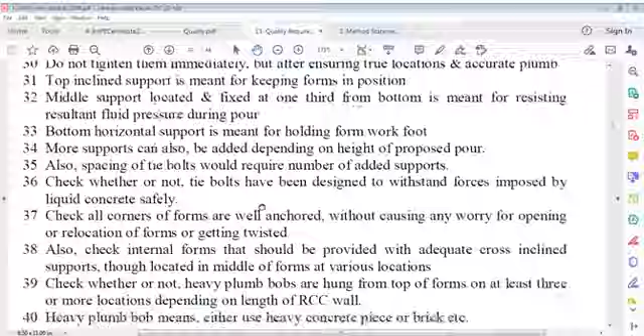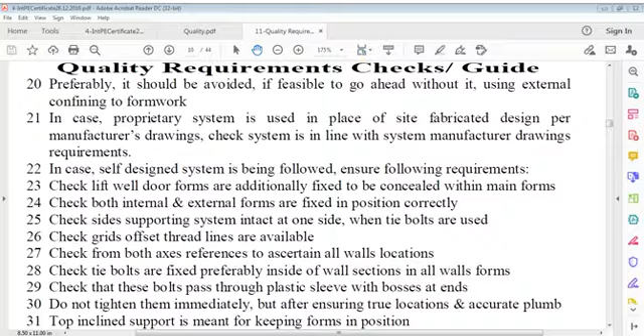Let me see how many points there are. About 46, 47, 48, 51, and maybe more—52, 57 are there too. Let me see if I have enough time for today, or how many I can read. I will read, or maybe we take it up early morning tomorrow. So still 9 minutes more, I think. Well, let us see what we can do. I should close this file, and let us see how much we can read.

I will repeat again: preferably it should be avoided, if feasible, to go ahead without using external confinement to formwork. As we said, in a lift case it can be done easily because it comes from below, and it's a big work. So there are many ways we can do this.

In case a proprietary system is used in place of a site-fabricated design, and that proprietary system is produced by the manufacturer with their drawings, check that the system is in line with the system manufacturer's drawing requirements.

This is a very important point, because when you take materials from some vendor or specialist manufacturer who knows shuttering work, you take their material and they have to give calculations also—what is the use of this material, what is its strength, how much load it can take, and what is the load of concrete. Whatever is required in terms of horizontal pressure and bending moment, all these are calculated in a systematic way, and all materials used are strong enough to resist that.

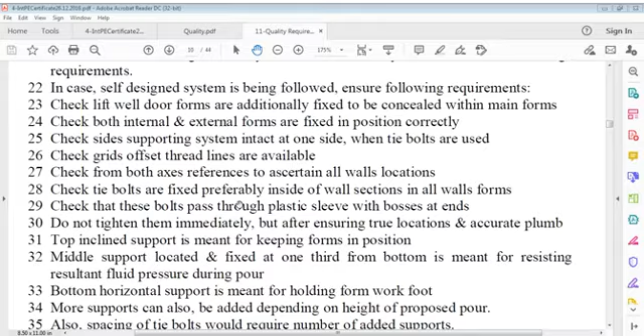Check tie bolts are fixed preferably inside the wall sections in all wall forms. Check that these bolts pass through a plastic sleeve with bosses at the ends. Do not tighten them immediately.

But after ensuring true locations and accurate plumb. Top inclined support is meant for keeping forms in position. Middle support, located and fixed at 1/3 from bottom, is meant for resisting resultant fluid pressure during pour. Bottom horizontal support is meant for holding form work foot.

More supports can also be added depending on height of proposed pour. Also, spacing of tie bolts would require number of added supports. Check whether or not tie bolts have been designed to withstand forces imposed by liquid concrete safely.

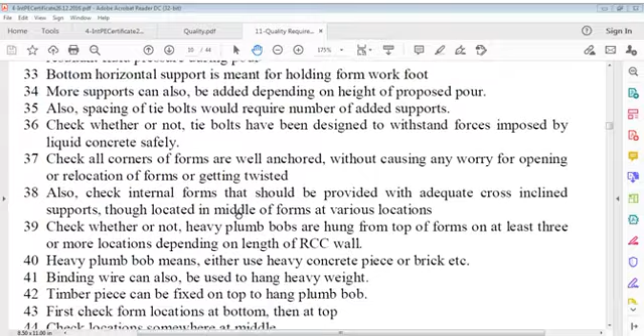Check all corners of forms are well anchored without causing any worry for opening or relocation of forms or getting twisted. Also check internal forms that should be provided with adequate cross-inclined supports, though located in middle of forms at

various locations. Check whether or not heavy plumb bobs are hung from top of forms on at least 3 or more locations, depending on length of RCC wall. Heavy plumb bob means either use heavy concrete piece or brick.

Let me check times. What time is now? Just 2 minutes, so I think better we just take a couple of minutes more.

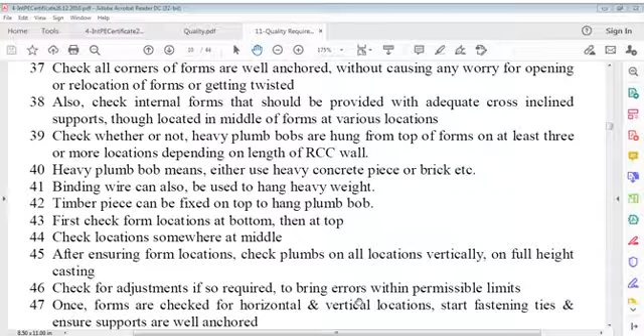Let me see. Heavy plumb bob means either use heavy concrete piece or brick, etc. Binding wire can also be used to hang heavy weight. Timber piece can be fixed on top to hang a plumb bob. These will be repetition activities. First check form locations at bottom, then at top. Check locations somewhere at middle.

After ensuring form locations, check plumbs on all locations vertically on full height casting. Check for adjustments if so required to bring errors within permissible limits. Once forms are checked for horizontal and vertical locations, start fastening ties and ensure supports are well anchored.

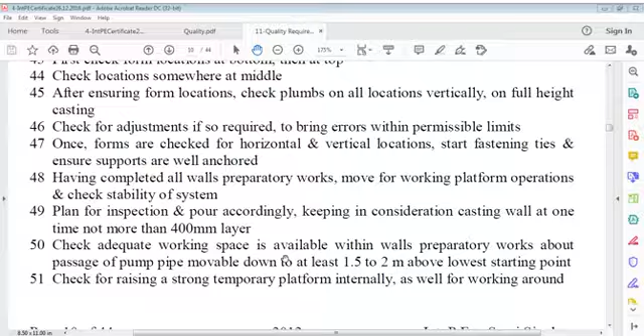Having completed all walls preparatory works, move for working platforms, operations, and check stability of system. Plan for inspection and pour accordingly. Keep in consideration casting wall at one time not more than 400 mm layer. That is casting process. But just thinking here. Check adequate working space is available.

Within walls, preparatory works about passage of pump pipe movable down to at least 1.5 to 2 meters above lowest starting point. Checks for raising a strong temporary platform internally as well as for working around.

Remember that concrete pour in well, that is lift wall well, is slow around walls but steady, as it has to be poured in rotations of heights not more than depth of nozzle. It would risk opening forms in case pour is allowed faster in one vertical go or two.

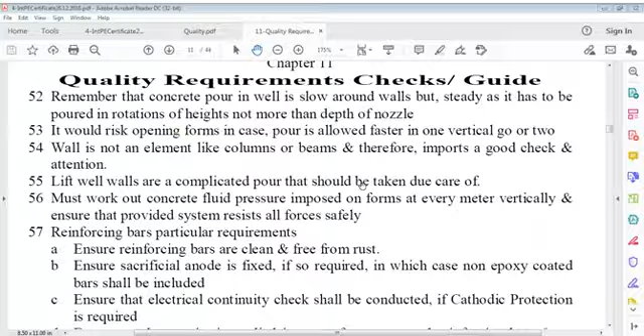Wall is not an element like columns or beams and therefore imports a good check and attention. Lift well walls are a complicated pour that should be taken due care of. Must work out concrete fluid pressure imposed on forms at every meter vertically and ensure that provided system resists all forces safely.

Reinforcing bars particular requirements. Ensure reinforcing bars are clean and free from rust. Ensure sacrificial anode is fixed if so required, in which case non-epoxy coated bars shall be included.

Ensure that electrical continuity check shall be conducted if cathodic protection is required. Ensure touch-up paint is applied in case of epoxy coated reinforcing bars, and no cathodic protection is permitted on epoxy coated bars.